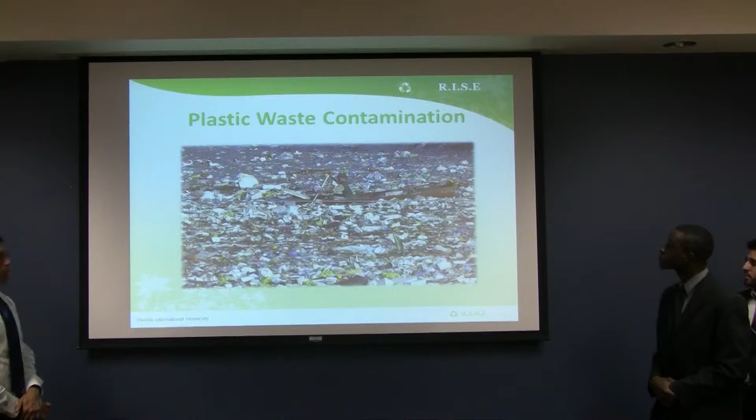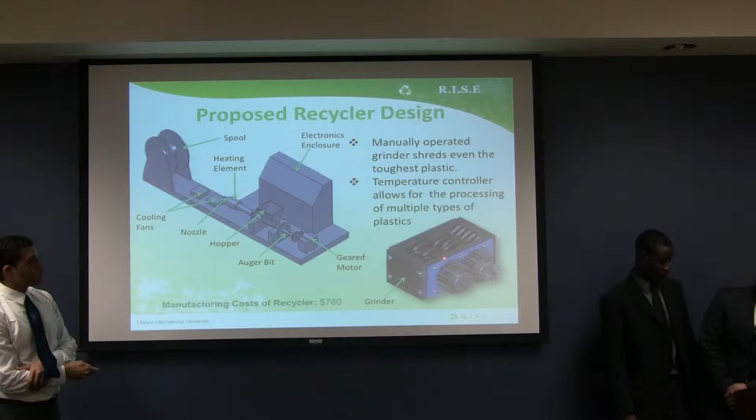Plastic waste is a huge issue in the world, and our solution to this problem is, as I mentioned before, the recycler. So the recycler essentially would start here at this custom-made tool steel shredder. The individual will go ahead and wash the plastic piece, process it through this manually operated shredder, and as the pieces are appropriate size, they will go into this hopper here.

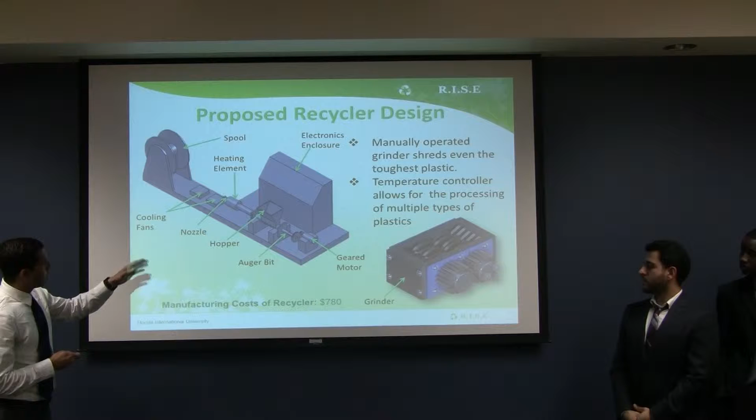The hopper will then funnel the plastic pieces into this chamber, which will have an auger bit driven by this geared motor, and it'll be funneled into this chamber here, which will be heated. And as the plastic becomes molten, it'll then extrude out of the nozzle at this point at about 1.75 millimeters in diameter, and it'll reach this area here, which will cool it. It's two cooling fans, which will cool it to retain its diameter, and it'll be then wound onto this spool,

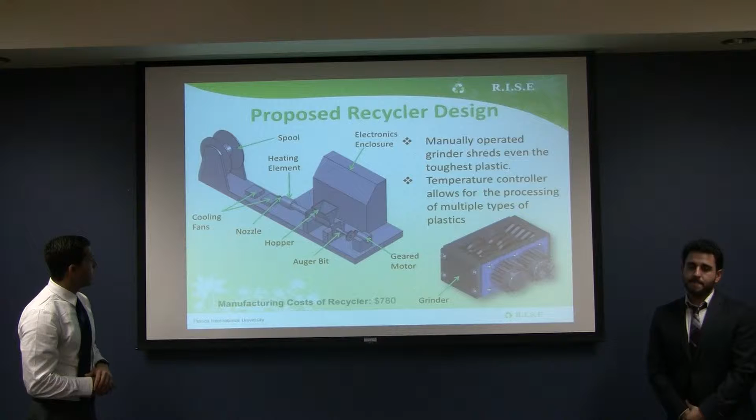ready for 3D printing. And at the root of it all, we have this electronics enclosure, which will house the microcontroller to be able to control the geared motor as well as the heating element, depending on which plastic we're going to be using. Now, we calculated the manufacturing cost of the recycler is about $780.

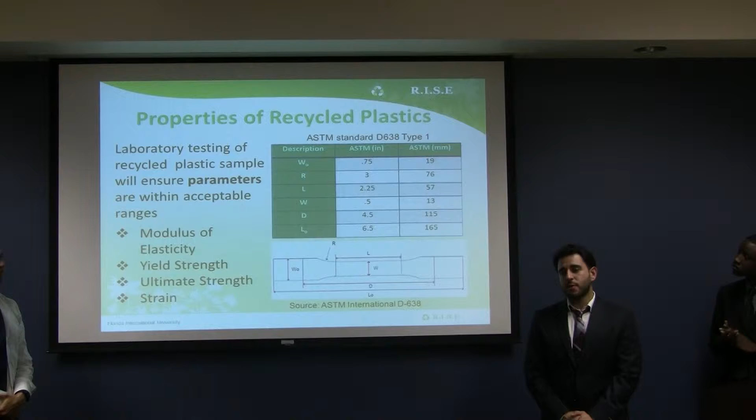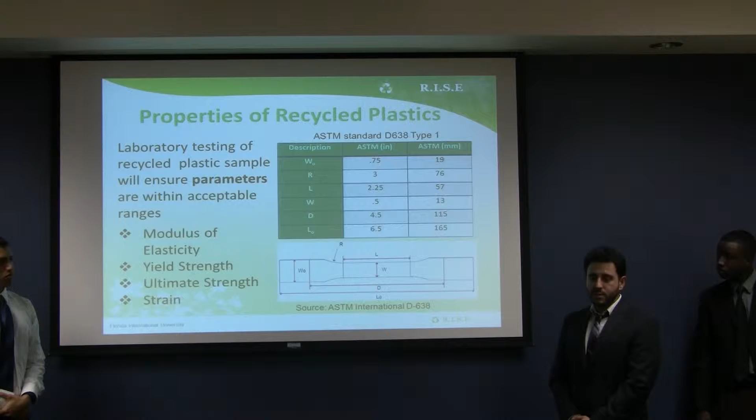Now, once we have the recycled filament, we'll be able to use a 3D printer and produce test specimens that are by the ASTM standard D638 Type 1 for semi-rigid and rigid plastics. With this, we'll use the FIU laboratories to produce tensile testing, and we will gain properties such as the modulus of elasticity, yield strength, ultimate strength, strain, to produce a safe and reliable product.

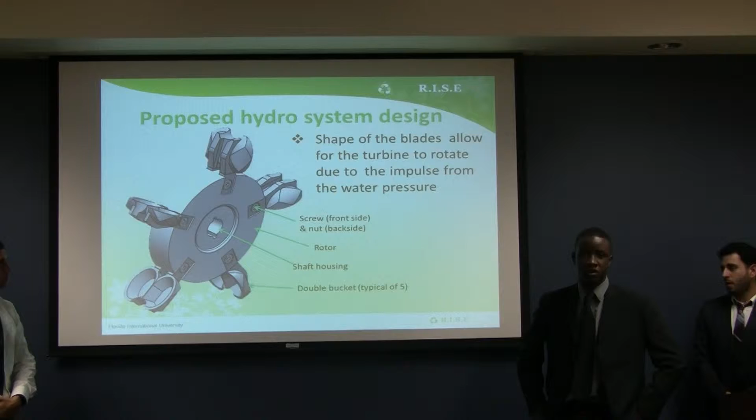So this is the proposed hydro system design for this project. So we went with a design similar to the Pelton turbine because we want to use head elevation in order to run our turbine. Why? Because we want to implement this type of turbines in areas that have rivers and high head elevation flow streams. So this design here, as you can see, has 5 different types of buckets.

The way it works is it takes the impulse from the water in order to rotate the whole turbine, and when the turbine rotates, it's connected to a generator. This generator will then output enough power, hopefully to charge a battery. For now, our estimated power is about 4 watts from the rainfall. So it's not much, but with the battery, we hope we can save enough for future users.

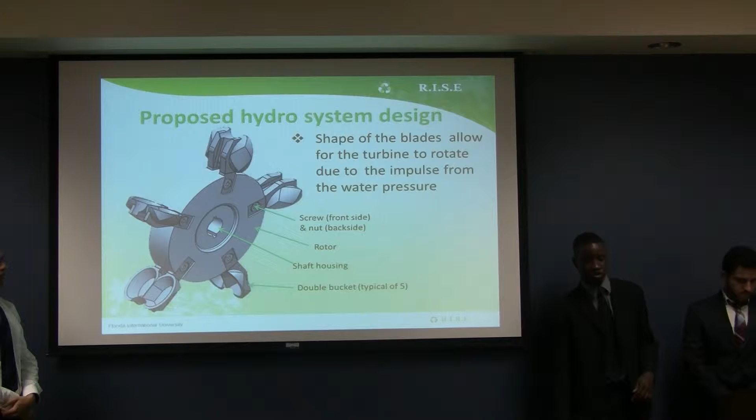All right, in order to optimize our designs, we will be using SOLIDWORKS as well as ANSYS simulation software, and we will be conducting laboratory analysis on the recycled polymers and gathering experimental data from the FIU solar house as well as the mobile energy unit. Thank you.

Do you have any questions? Hey, one quick question. Why 2 projects? Excuse me? I mean, I think you've got 2 projects here. One being the recycler and the other one being the turbine for the gutters.

And why I ask it is that if you work one of those projects, you could get into the design stronger. You could get into the analytical piece of understanding your design. You can develop it, you can test it. You get into doing double, and that just cuts in half the amount of time you have to be able to achieve those goals.

I feel that the reason we decided to do 2 is essentially because from the beginning of the summer, I had been working on this recycler on my own, doing a lot of research and parts acquisition. So it had already been a developing project on my own, and I joined their group, and they had already had this idea of a turbine, and we came up with the idea of being able to manufacture it through 3D printing.

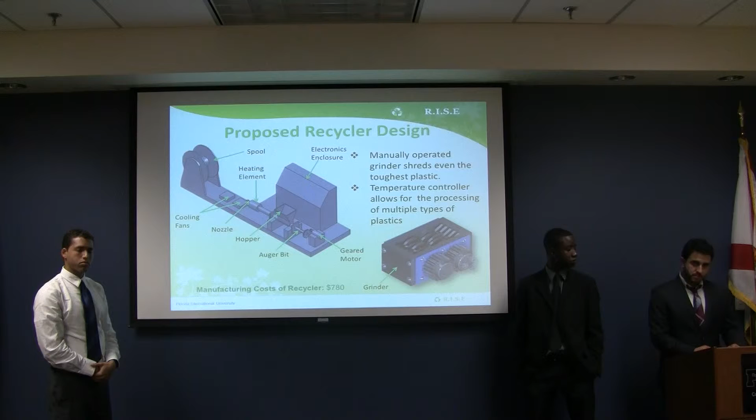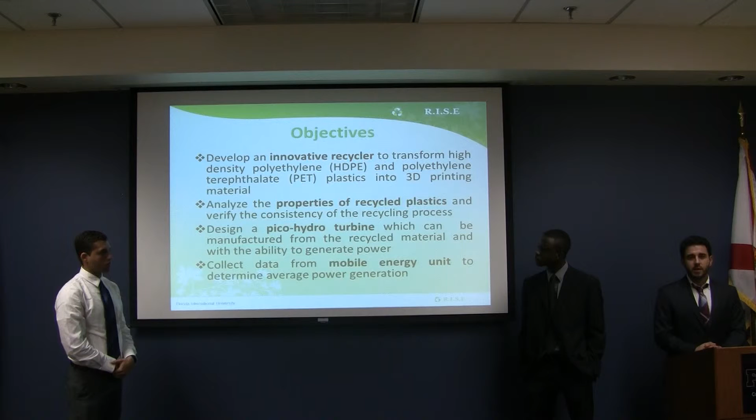Could you refresh my memory on the global components? It didn't quite hit me between the eyes. Well, the global components are to address some of mankind's most pressing issues, such as energy poverty, water security, sanitation, as well as plastic waste pollution. So where is that in your slides? Oh, there it is.

So we also plan to make some manuals and provide some technical training for these communities that are willing to accept the training. We don't want to just enforce the aid on them, but we want the community to be willing to accept this aid, so it's not something that's enforced like the traditional aid that has been used in the past.

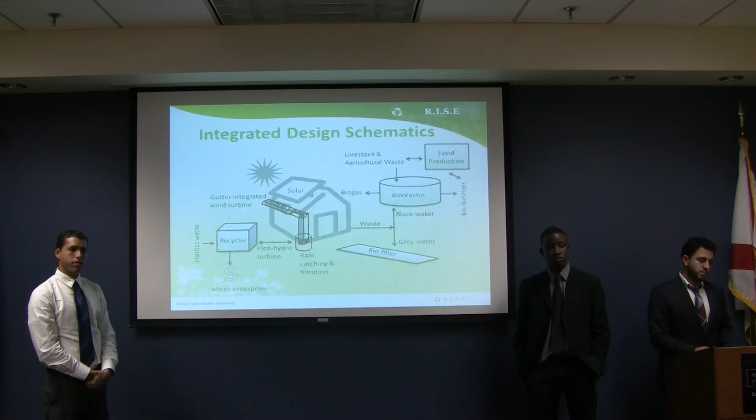Okay. Can I do one more? So how do you guys integrate together? Are you making 3D printed parts for some of the filters and things like that? So the idea is, like they were saying, to do an integration of technical components that address these issues. So when you guys are saying there's several projects, it's not really all of those, because we are basically focusing on one at a time. We're gonna focus on the building of the recycler first, then the manufacturing of the pico turbine.

Where we come into play is in the water treatment, the water filtration, so the accessibility of clean drinking water from purifying it from the rain, as well as treating the waste generated. So it's treated in a biologically friendly way. Like I said, this is a technical proposal, so that we have a zero waste, zero net carbon emission project that addresses all these things through technical aspects.

Could your civil partners introduce themselves formally? Yes, my name is Paola Davalos, environmental engineering. Would you mind standing and introducing yourself? Of course, sorry. Paola Davalos. My name is Natalia Duque. I'm also an environmental engineering student.

I just wanted to highlight it real quick, and I've been on the committee for a long time. You've got a lot here. And as a result, you've also got a semester to get it all done in. And we do expect data, of course, and prediction and data to demonstrate that you met your prediction, or you didn't. Definitely. That's where our concern comes from, is that we've seen a lot of projects, and they don't do it. I don't want you boiling the ocean.